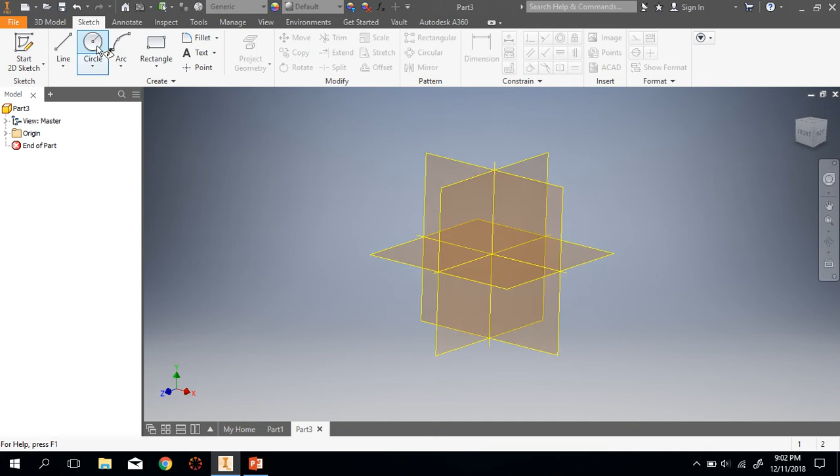So again, we'll start off by sketching the 2D representation of the bowl, starting with two concentric circles. We select the plane that we want to draw on, and we can select both our circles. We'll use the origin point as our starting point, so it'll snap to it with the green circle. Select one circle, go back, select the second circle.

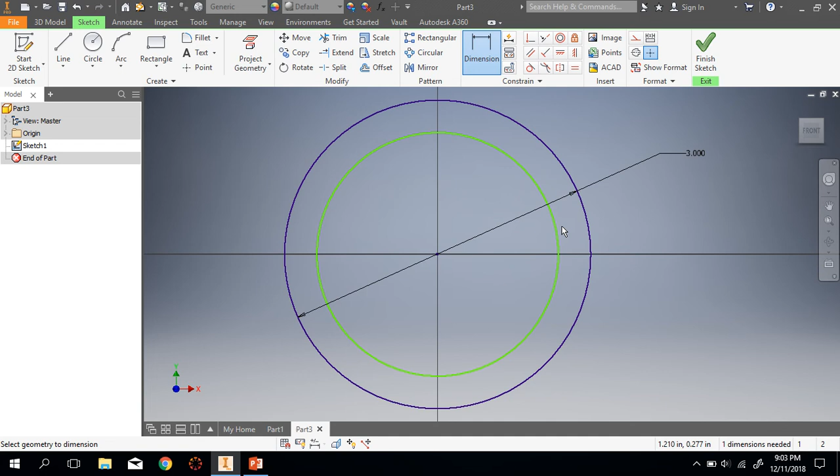We will dimension them to get the size. We want a 3-inch diameter bowl, so we type in 3. The circle turns blue because it's been fully constrained. We'll dimension the second one. We want it to be slightly smaller so the bowl has some wall thickness, so we'll go with 2.8 inches. So now we have two circles that are 0.1 inches apart on each side.

Now the upper half of the circle we do not want because we want it just to be the bottom half, so we need to use a line. You come over to select line. We're going to click on one end of the outer circle and drag it all the way across. So now we have the green line that bisects the circle.

Inventor has a feature called trim, and what trim does is it will basically take any line and remove that portion up until it intersects with a different line. So when you select trim, it'll highlight it. I'm hovering over the inner circle, and you see the top half is dotted. All of this dotted line will be erased when you click on it. So I can click on it, and it erases the half, so we're just left with the bottom half of the circle.

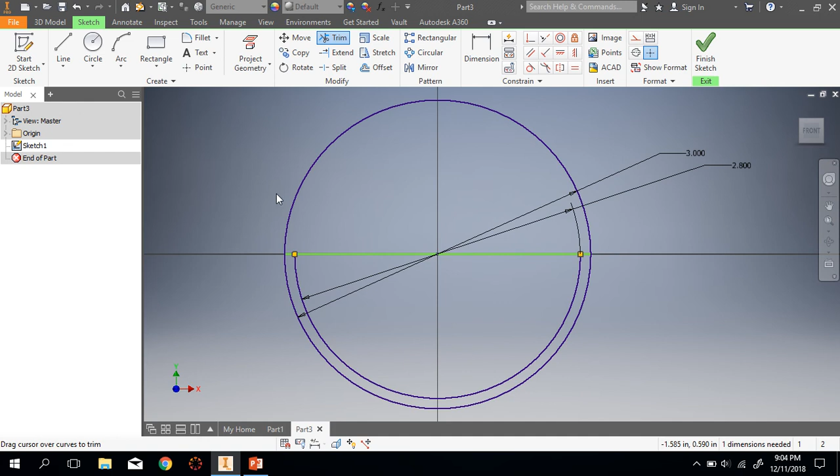Instead of clicking on it, you can drag to erase multiple portions. We want to get rid of the upper portion of the outer circle, and we also want to get rid of the line inside the bowl because we want it open. So you can click and then drag your mouse so you see a dotted line coming out of it. Any line that the dotted line intersects with, it will delete, so then you can release it. Now we've erased both upper halves of our circle, and we're left with little line segments that connect the two, so we have an enclosed surface.

We can't revolve it at this point because we need a stable base, so we need to create a platform on the bottom here for the bowl to rest on.

So we can start by making a vertical line between the two circle segments, and we're going to use the offset command. What offset does is it takes an existing line and makes a copy that you can move in either direction. We want our line to be offset by about 0.5 inches on each side.

When you click it, you can drag it to one side and it'll bring up the distance. While it's highlighted, you can type in 0.5 and hit enter, and it'll move that line over and automatically dimension it. Do the same thing to the other side, 0.5 inches.

So now we have two lines spaced by an inch. We need to close that in on the bottom to create the surface. You'll go back to clicking on line. We'll click the bottom corner of the left line and connect it to the bottom corner of the right line. Click it. We've now created the line, so now this is closed in.

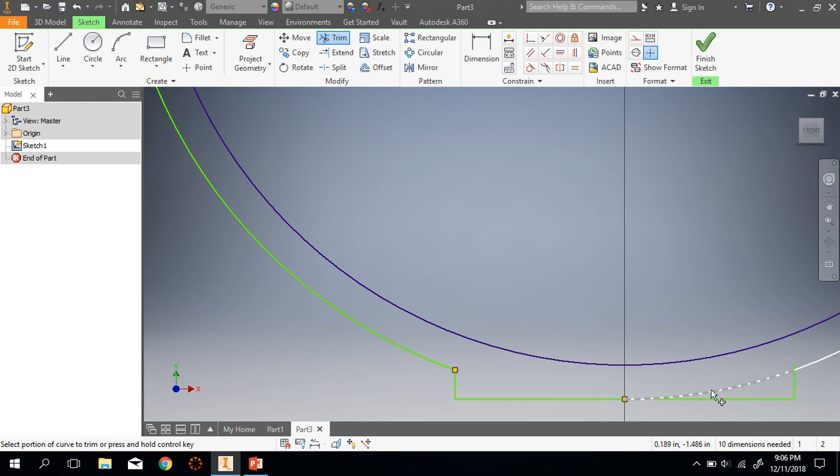We'll go back to our trim function, and we just need to clean this up so it becomes one solid feature. Zoom in. We need to trim this excess line here, trim the circle, the bottom circle that goes into the feature, and trim away the original line we used. Come over to the right side, trim the extra line segment, and trim the circle.

So when we zoom out, you can see we now have a circular bowl pattern here with the base built in. The inside part would all be solid structure. But to revolve it, we cannot simply revolve this entire feature. We only need to revolve half of it, because we'll revolve that one half 360 degrees. So even though we created all this, we have to erase half of it.

So we'll make a line segment from the origin down to the middle. Use our trim feature to clean it up, so you just get rid of one side or the other. It doesn't matter, just make sure you get rid of all the lines on one side. Don't forget the little line segment at the top here. So now we only have half of our drawing, but we also have this line here that we can use to revolve around, because that's the center point.

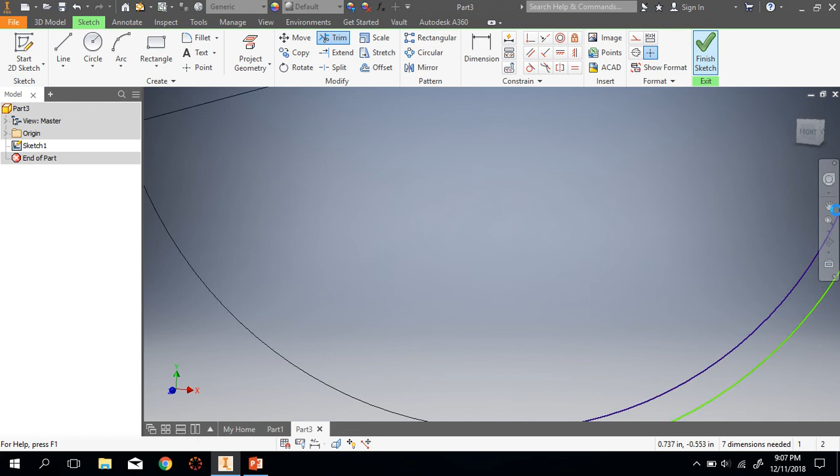So we can click Finish Sketch. It'll take us out, and you can zoom out to where we have a full view. Now we're ready to do our 3D revolve. You'll click over to the 3D Model tab and select the Revolve command. Since there's only one enclosed object, it automatically highlights it for the profile. The profile defines what we are revolving to create our 3D solid.

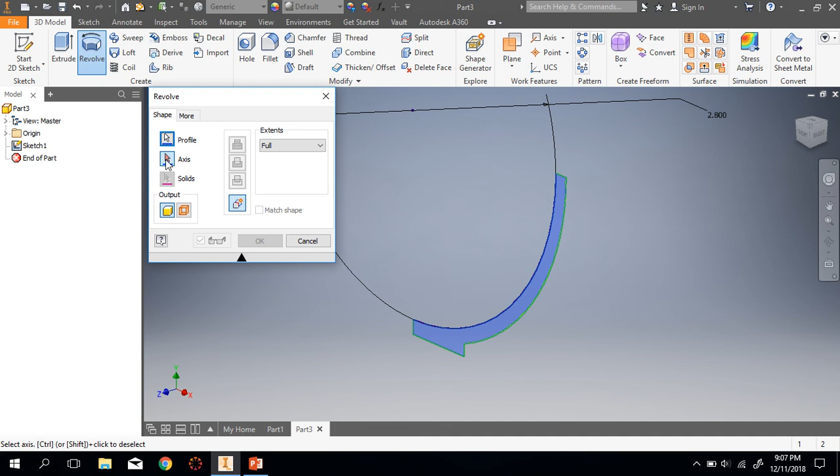The axis is the point at which we rotate that around. So for the axis, you'll have to click on the axis button. We'll zoom in, and you will select this vertical line since this is the center point of our bowl. We select it, and it'll give you a preview of the bowl. This looks correct, so we can click OK.

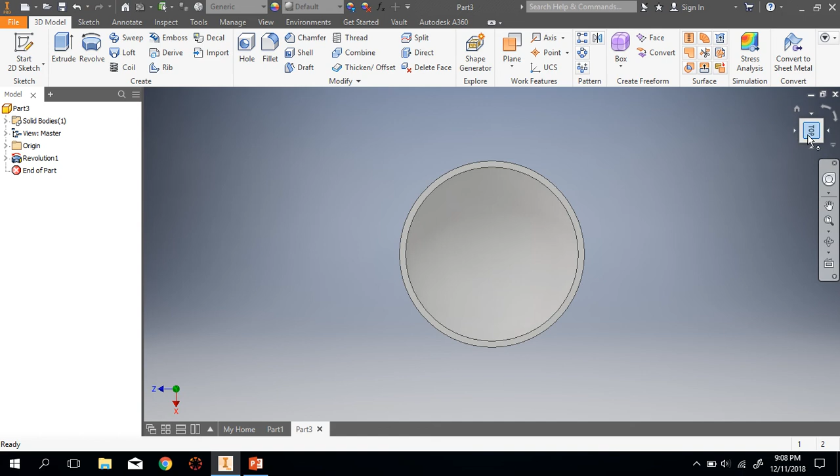And that's it, we have the bowl. It's a perfect half sphere inside, and on the bottom we have the little flat pedestal for it to rest on. So then this could be 3D printed, or we could create a mold for it.

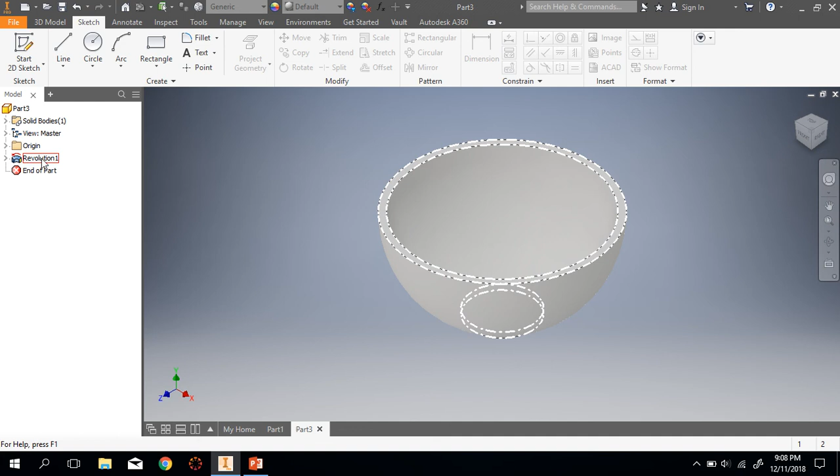Just to recap, we used the circle and line commands to draw our feature. And always on the model tab on the left, you can see the revolution. So this is what we did to create our 3D object. It highlights what that object is, and if you click the little arrow next to it, it'll drop down the sketches that go into it.

So remember, we used arcs or circles to create the outline for our spheres, and then lines to create the flat portions. And we used trim and offset to trim away excess lines, and the offsets to create the lines and move them their proper distances away from each other to create our base.